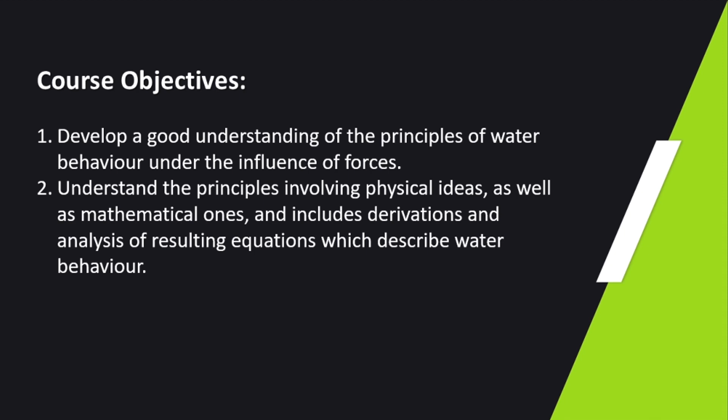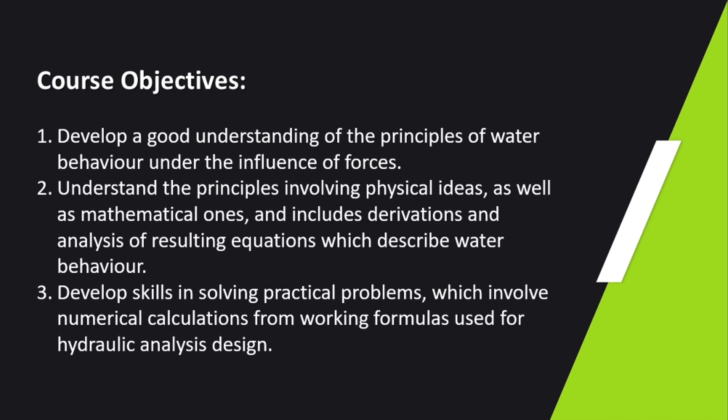So let's first talk about the course objectives for this subject. Number 1, we should develop a good understanding of the principles of water behavior under the influence of forces. Number 2, understand the principles involving physical ideas as well as mathematical ones, including derivations and analysis of resulting equations which describe water behavior. And number 3, develop skills in solving practical problems which involve numerical calculations from working formulas used for hydraulic analysis and design. Let us first define fluid mechanics or hydraulics.

Fluid mechanics is one of the branches of engineering mechanics. Our engineering mechanics has three branches. First, we have the mechanics of rigid bodies. And the mechanics of rigid bodies is divided into two: statics of rigid bodies and dynamics of rigid bodies.

In statics of rigid bodies, we study the action of forces on a particle that is rigid. Rigid means undeformable, it doesn't deform. Then, what is the behavior of that particle under the action of forces? If it remains at rest, that is statics. But if there is motion or acceleration in our particle, that we study in dynamics of rigid bodies.

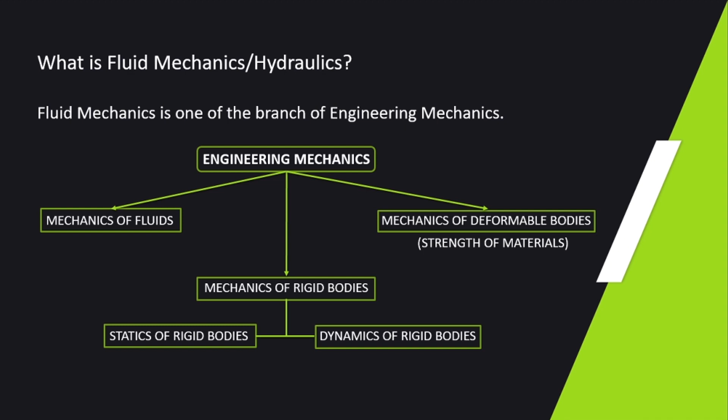Another branch of engineering mechanics is the mechanics of deformable bodies, or what is called strength of materials. And the last branch of engineering mechanics is the mechanics of fluids.

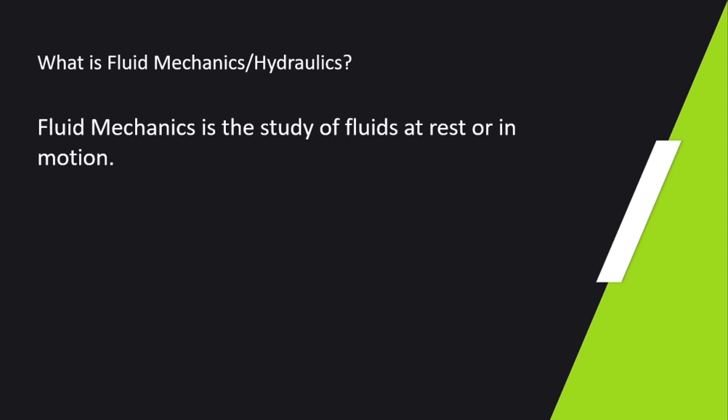Another definition of fluid mechanics or hydraulics: it is the study of fluids at rest or in motion. We study here the behavior of fluid whether at rest or in motion. Fluid at rest refers to fluid statics. Fluid in motion is what we call fluid dynamics, or what is truly called hydraulics.

In the old curriculum in civil engineering, we had Fluids 1 and Fluids 2. Fluid statics is what was called Fluids 1 in the old curriculum, and fluid dynamics is what was called Fluids 2. So basically, fluids have only 3 phases.

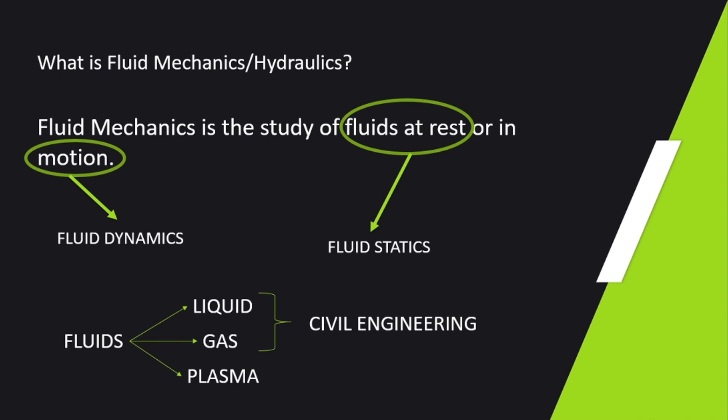It can be a liquid, it can be a gas, or it can be a plasma. But of course, in civil engineering, what we study or use as fluid is only liquid and gas, because plasma is part of our body and we don't cover that in civil engineering. So we focus more on liquid and gas.

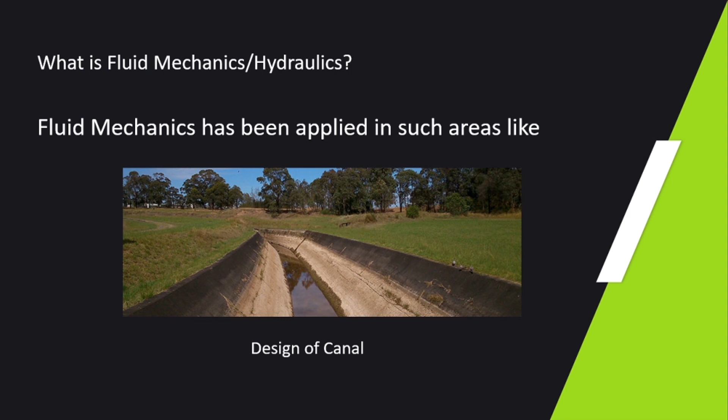Fluid mechanics has also been applied in areas like designing canals. So how do we design our canals using fluid mechanics? Like that. It can also apply to dams, because before we design a dam, we must first know the behavior of the water or liquid in the dam. So what pressure does it give? That is the analysis we need before we design our dams.

Just like structural theory, before we design the structural members of our building, we need analysis or structural analysis. We solve for the forces and stresses that our structure will carry. So for dams too, we need to know the forces and stresses they will carry, which we can use in designing our structure. Basically, our designs for dams are reinforced concrete design, because to avoid rust, we can't use steel design for that.

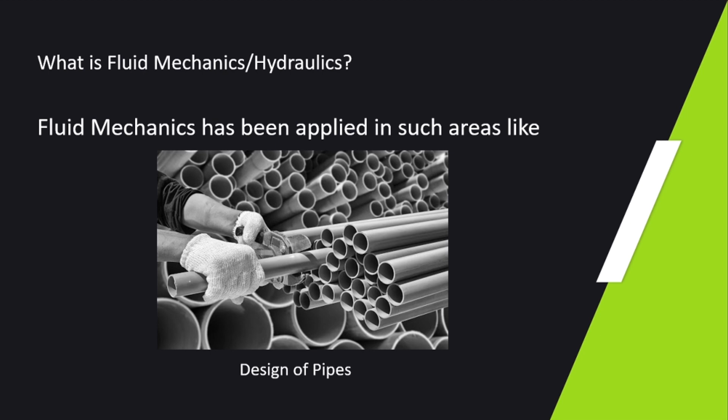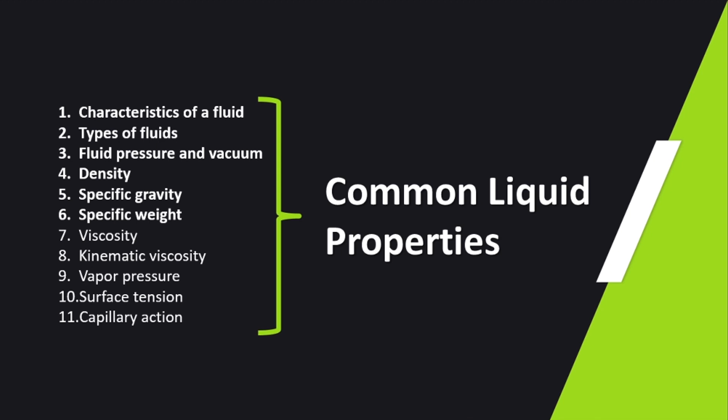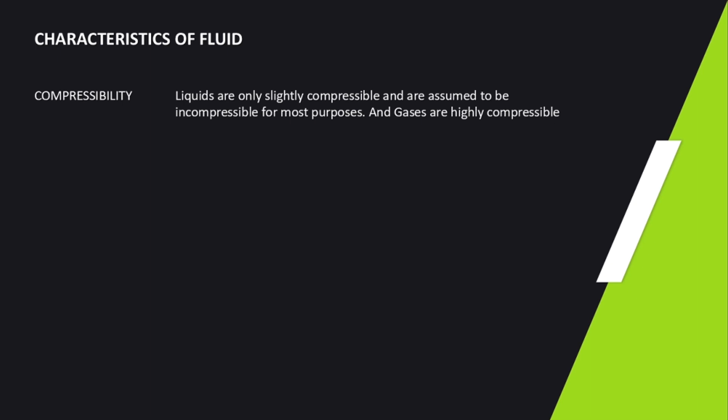So first, let's discuss the characteristics of a fluid. First characteristic, it is compressible, or we have compressibility. Liquids are only slightly compressible and are assumed to be incompressible for most purposes. And gases are highly compressible. This means in fluid mechanics or hydraulics, we usually assume our liquids are incompressible.

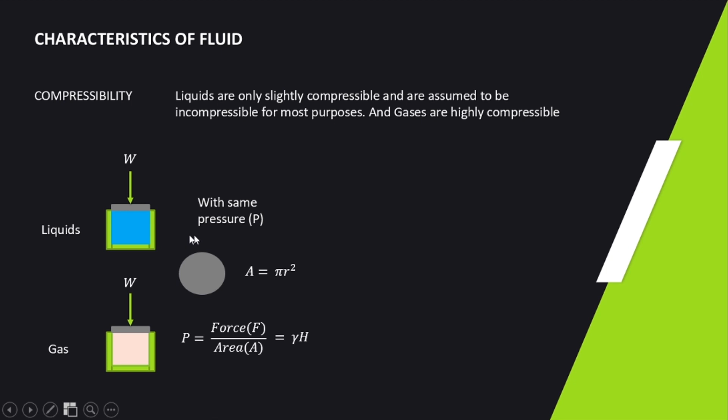For example, we have a liquid and gas in a container, and we apply a weight on top of the fluid. This is the liquid and this is the gas. With the same pressure P, this pressure is the weight. For example, we have the weight of this material resting on the water and also on the gas, with the same area. If this is a cylindrical container, we have a circular cross-sectional area, and our pressure is equivalent to force per area.

In fluid mechanics, the formula usually used for our pressure is gamma H. Later, I'll explain what this means - what this gamma symbol means, and what our H is.

The behavior of liquid when subjected to pressure, the volume stays the same. It doesn't change, meaning our liquid is incompressible. And the density is also the same, because of course the volume doesn't change and our mass is constant. We all know the formula for density equals mass over volume. If the volume doesn't change and the mass doesn't change, then of course our density stays the same.

For gas as the fluid, the behavior is different. The volume decreases, as you can see in the figure, and the density increases. If we go back to the formula for density, when the volume value decreases, the density value increases, because the denominator gets smaller, so the density value gets larger.

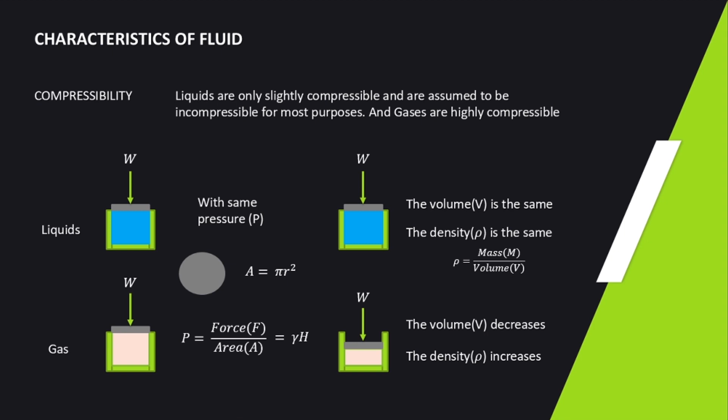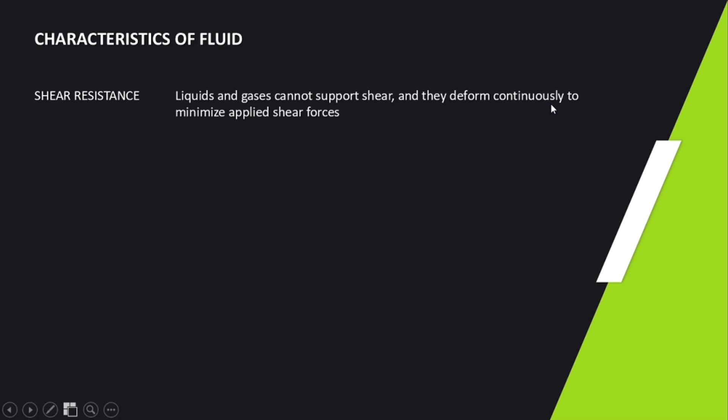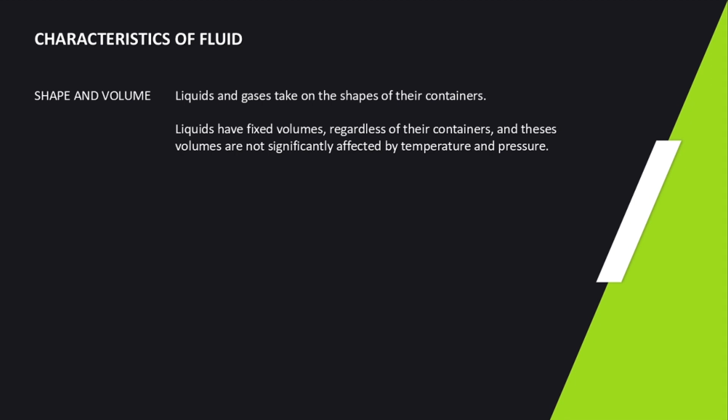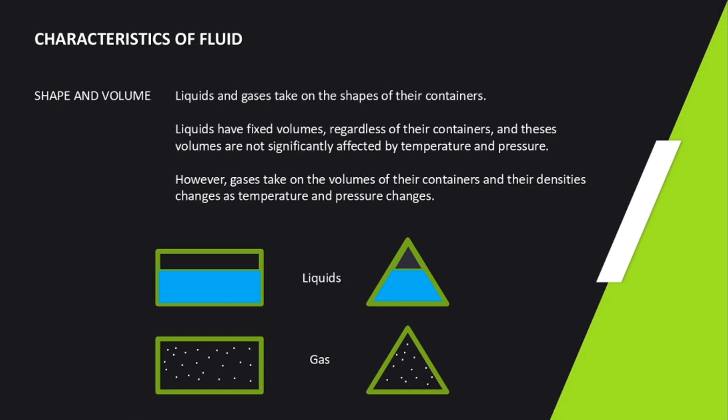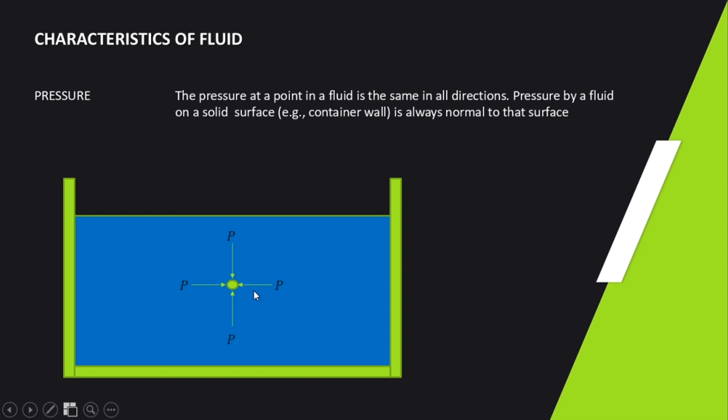For example, if there's a pressure direction going this way, there should be an equal and opposite reaction. If there's pressure to the right, there should be pressure to the left. And if there's downward pressure, there should also be an opposite upward pressure. That's what it means for pressure to be the same in all directions.

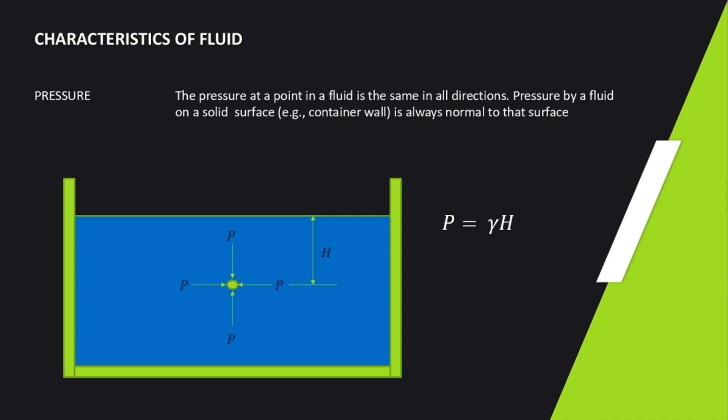This is located at a value of H, which means the height from the water surface. And our pressure, as I said earlier, is equivalent to force over area, or gamma times H. What does gamma mean? Gamma is the unit weight of our liquid, and H is the height at which we're taking our pressure.

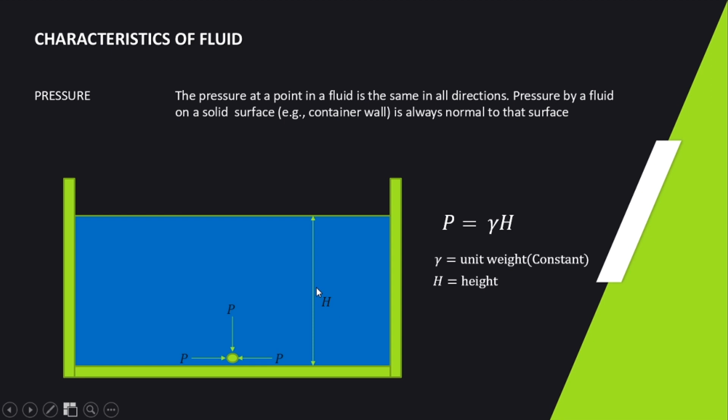But going back to the earlier slides, if we're at the center at any point, the pressure is in equilibrium, or the same in all directions.

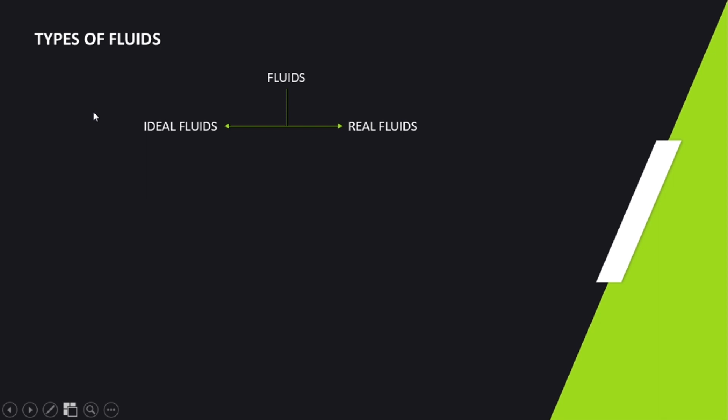Another property of fluid: we have types of fluids. Our fluid is divided into two, ideal fluid and real fluids. Usually what we use is ideal fluid. We have assumptions here to make our calculations in the subject easier.

For real fluids, we have Newtonian and non-Newtonian. Usually we don't cover this in the subject, so we focus more on ideal fluid to make our calculations easier.

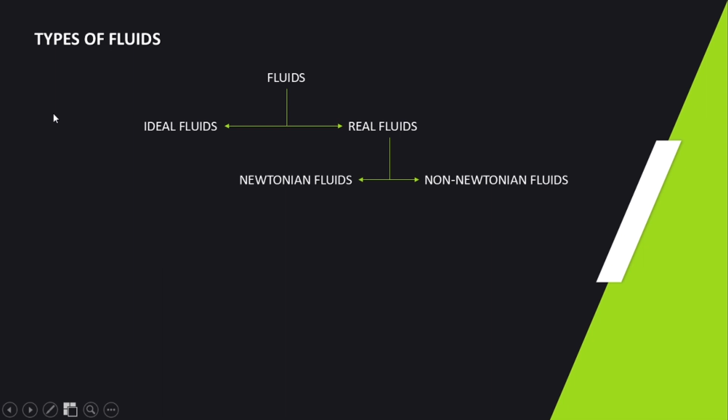Ideal fluid is assumed to have no viscosity or no resistance to shear. We also assume it's incompressible, meaning it cannot be compressed, and that it has uniform velocity distribution when flowing. That is ideal fluid.

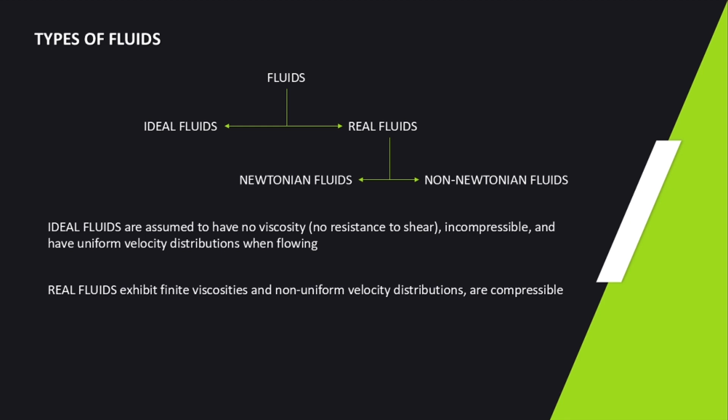Real fluids exhibit finite viscosities and non-uniform velocity distributions, and are also compressible. This is the difficult part when we consider real fluids. Real fluids are divided into two types, Newtonian and non-Newtonian fluids, depending on their viscous behavior. We won't discuss that much in this subject, so we'll focus more on ideal fluids.

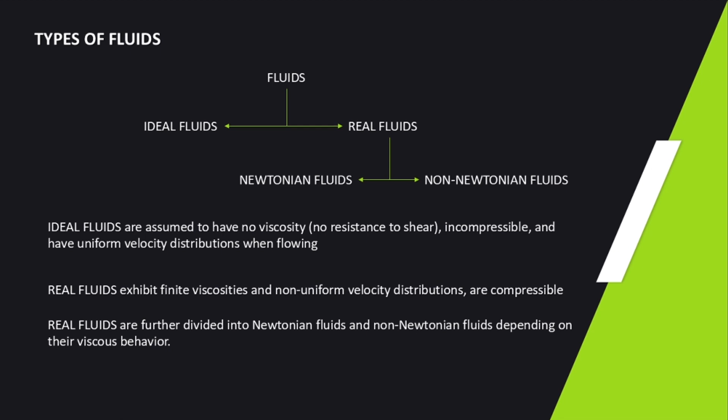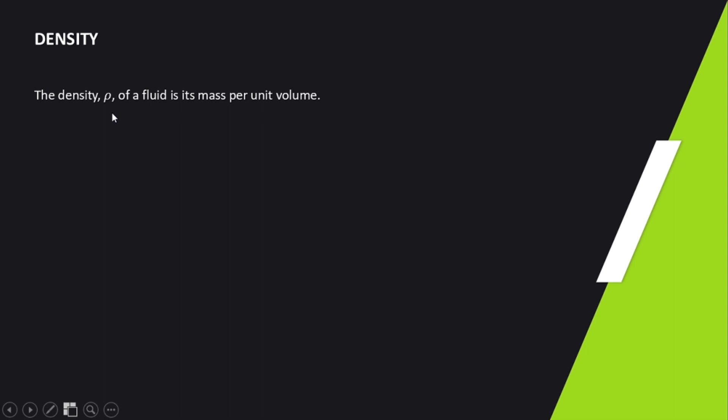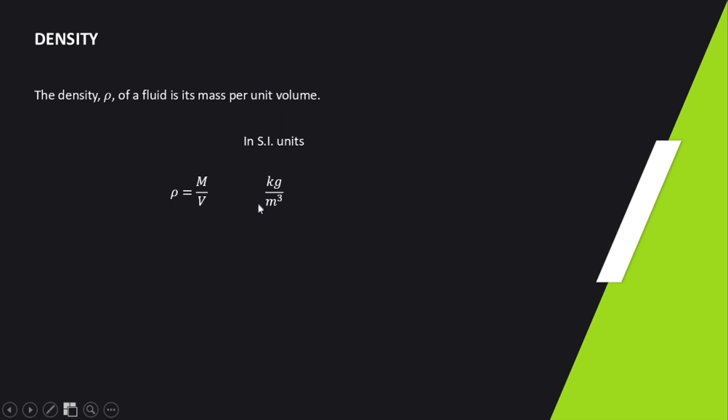The next property of a fluid we should know is density, especially for the constants we use for water and other fluids in this subject. The density, with symbol rho, is the fluid's mass per unit volume. So the formula is m/v. The unit for SI is kilogram per cubic meter, but for English units, it's slug per cubic foot or pound mass per cubic foot. This density property will be used from now until the end of the semester.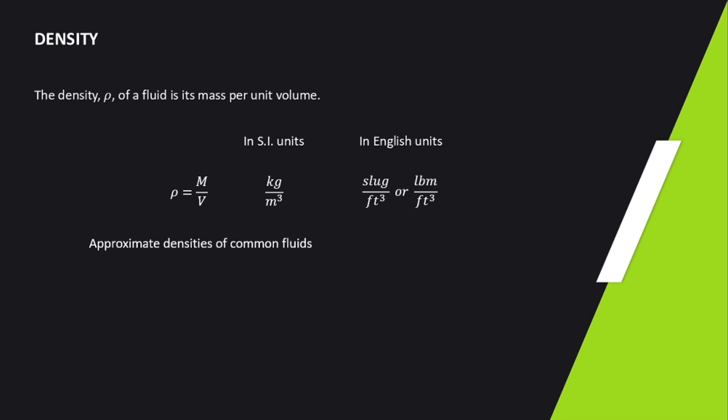We also have approximate densities of common fluids used especially in this subject. We have a table with fluids like water, seawater, oil, and mercury. These four are usually used in this subject, given in pound mass per cubic foot or kilogram per cubic meter. This is usually what I memorize, then convert to pound mass per cubic foot.

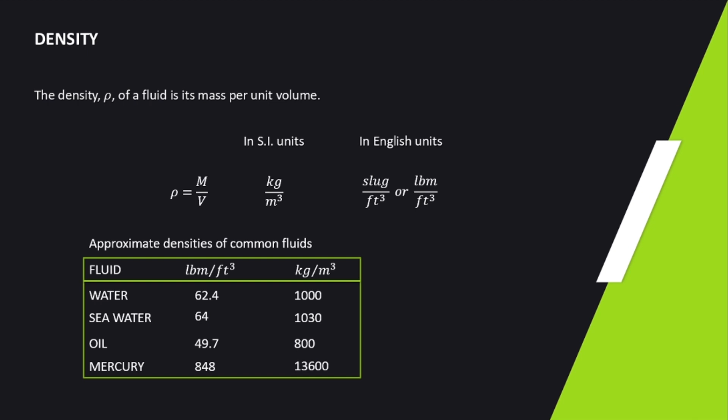For water, we have 1,000 kg per cubic meter. For seawater, we have 1,030. For oil, 800. And for mercury, we have 13,600. Again, these are approximate, not accurate values. These are the approximate densities we use for these fluids, so you should remember them.

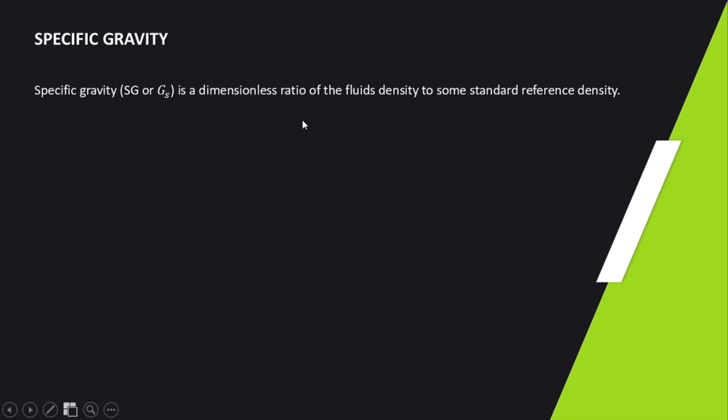Another property of a fluid is specific gravity, designated as SG or GS. It is a dimensionless ratio of the fluid's density to some standard reference density. For liquids and solids, the reference is the density of pure water. So SG for liquid equals the density of the liquid over the density of water, which is 1,000 kg per cubic meter, to find the specific gravity of that liquid.

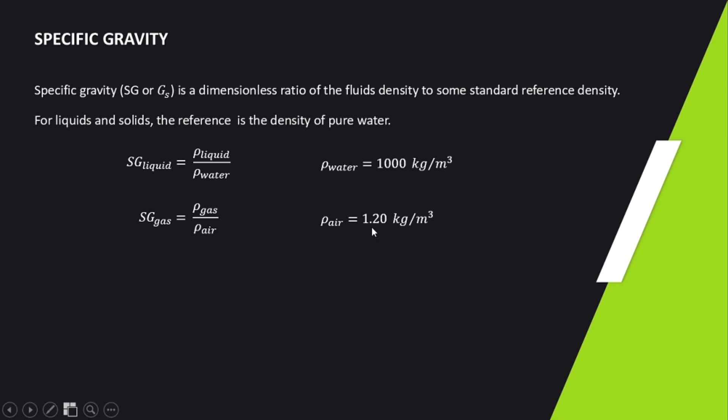But for gas, the reference is not water. For gas, it's equivalent to the density of the gas over the density of air. So the reference this time is the density of air, which is equivalent to 1.20 kg per cubic meter. You should remember that, and note it's also approximate, not exact.

We also have another property called specific weight, or unit weight, with symbol gamma. It is the weight of the fluid per unit volume, so the unit should be in Newton or pound force per volume. The formula for specific weight or unit weight of our fluid is equivalent to the density of the fluid times G. What does G mean?

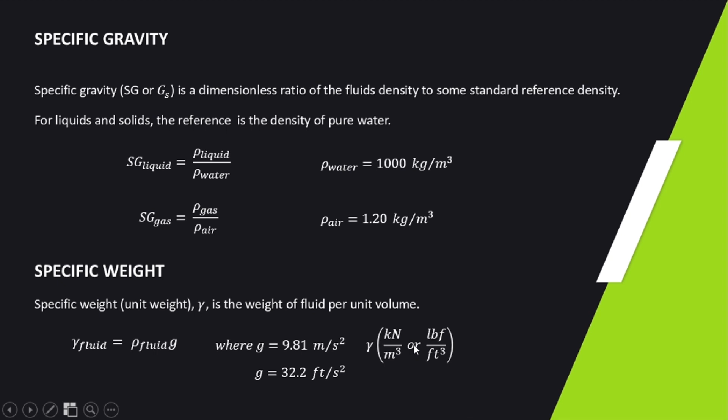G is the acceleration due to gravity, which for metric units is 9.81 meters per second squared, but for English units, the value of acceleration due to gravity is 32.2 feet per second squared. You should remember all these values, especially for exams, because sometimes they are not given. Our unit for specific weight, for metric units, is kilonewton per cubic meter, and for English units, it's pound force per cubic foot.

Another property of our fluid is fluid pressure and vacuum. I'll make another video in my next presentation to give many examples on this. This is the last part of this presentation, so I'll give a brief introduction to this part. Our pressure is equivalent to gamma H, and the unit is kilonewton per square meter, or pascal, or kilopascal, or megapascal. We use kilopascal and megapascal to make the value smaller.

Kasi pag pascal yung ginagamit natin lagi, baka magbigay ng malaking pressure value. Para kumonte yung value niya, gumagamit tayo ng kilopascal or megapascal.

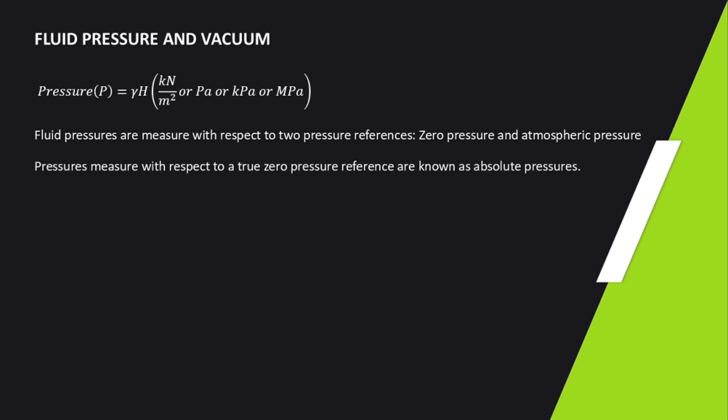Fluid pressures are measured with respect to two pressure references: zero pressure and atmospheric pressure. Ito yung mga reference natin when solving the pressure in our fluids. Pressures measured with respect to a true zero pressure reference are known as absolute pressure.

Ang pressure na measured with respect to atmospheric pressure naman ay known as gauge pressures. Para ma-distinguish itong dalawang pressure measurements, ang letter A at G ay traditionally idinadagdag sa unit symbols sa English unit system. For example, 14.7 PSIA, ibig sabihin pounds per square inch absolute. Kasi yung A, ang ibig sabihin noon ay absolute. At yung G naman ay gauge pressure.

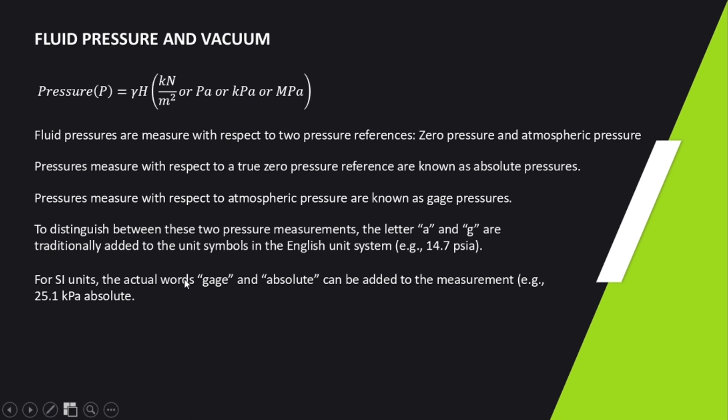Para sa SI units naman, yung actual word talaga ang dinadagdag natin. For example, yung measurement na kilopascal, dahil metric unit or SI unit ito, instead na A ang idadagdag natin, dapat yung word na absolute. For example, kilopascal absolute. For simplicity, mayroon tayong formula: ang absolute pressure natin ay equivalent lang sa gauge pressure plus atmospheric pressure.

Sa distance h, ang pressure niyan ay equivalent lang sa height of that fluid, ng particle mula sa water surface, times ang unit weight of the fluid. Kung water yan, dapat alam mo ang unit weight of the water, equivalent lang yan sa 9.81 kilonewton per cubic meter.

Itong pressure na nakuha natin ay gauge pressure, kasi ang atmospheric pressure natin ay constant. Nakukuha ito sa surface of the Earth. Halimbawa, tayo dito sa surface of the Earth, meron talaga tayong nararamdaman na pressure, tinatawag na atmospheric pressure, at equal lang ito sa 14.7 PSIA or 101.325 kilopascal.

Feeling natin kasi wala tayong nararamdaman na pressure, pero since we are born dito sa surface ng Earth, meron talaga tayong nararamdaman na pressure. Ito ang atmospheric pressure, ang dahilan kung bakit hindi tayo nag-eexplode dito sa surface. Pero kung aangat tayo pataas mula sa surface of the Earth, liliit ang pressure natin at doon tayo mag-eexplode sa taas.

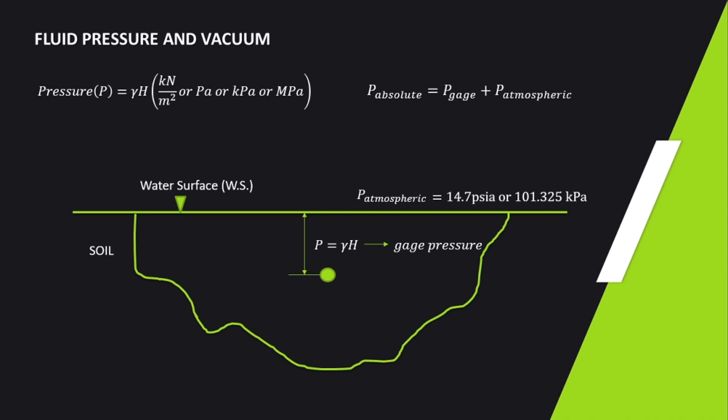Usually dito sa subject natin o sa fluid mechanics, kapag hindi ako nag-indicate kung gauge or absolute, usually gauge ang pinapahanap ko.

Next, pag-usapan din natin ang vacuum. Ang vacuum measurement ay implicitly a pressure below atmospheric, ito ang negative gauge pressure. Halimbawa, kung umangat tayo sa water surface o sa earth surface, siyempre magbabawas tayo ng pressure at magiging less than sa atmospheric, ibig sabihin negative gauge pressure. Pero kung pupunta tayo pababa, ang gauge pressure naman natin ay magdadagdag, kaya ang designation dito ay positive. Ibig sabihin, pag downward, iyon ay positive gauge pressure. Kaya ang vacuum ay pataas lang o pag ang pressure natin ay nagiging less than sa atmospheric pressure.